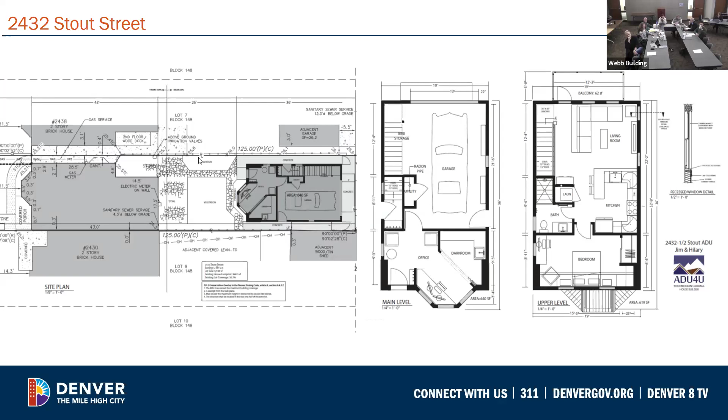Pictured here is the site plan and the first and second floor plans for this ADU. The ADU will be 36 feet by 19 feet and will be 24 feet in height. It will be located at the back of the lot, and the floor plan page also shows that the proposed windows on the ADU will be inset 2 inches.

Per the commission's comments, the applicant has simplified the detailing and removed the stepped parapet on the northwest elevation, but has retained the slant mansard-like roof on that elevation. The primary roof will be a flat roof form with mansard roof dormers and a hip roof bay on the northwest elevation. The flat roof will be clad in a membrane roofing material.

The mansard roof will be clad in a fiber cement half round shingle siding material, and the dormers and bay windows on the northwest elevation will be clad in standing seam metal roofing material with a matte black finish. The southeast alley elevation will feature hip roof canopies over the garage door and over the rear balcony, also clad in that standing seam metal roofing material with a matte black finish.

The northwest elevation will be clad in summit brick in the color medium red, and the brick will wrap the corners of the building. The southwest, northeast, and southeast elevations will be clad in that fiber cement half round shingle material that's on the slant or mansard-like roof. The building will feature Weather Shield double hung aluminum clad wood windows.

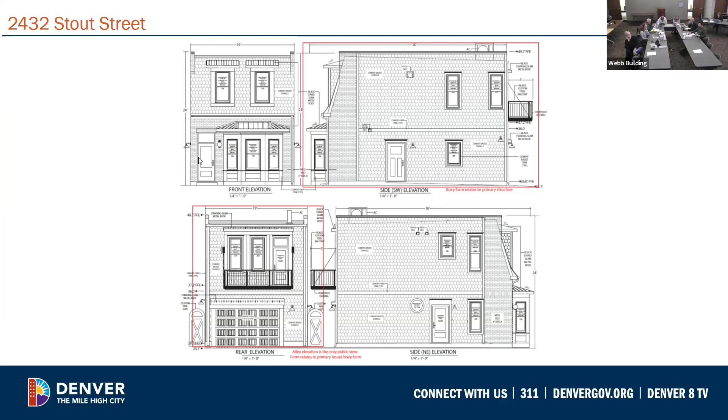Staff would like to note that the buildings on this block are very tight together, and the ADU will be only slightly visible from public vantage points. While staff feel that visibility does factor into the overall impact of the ADU, staff base their review on previous commission deliberation as well as the design guidelines, which don't really talk about that visibility.

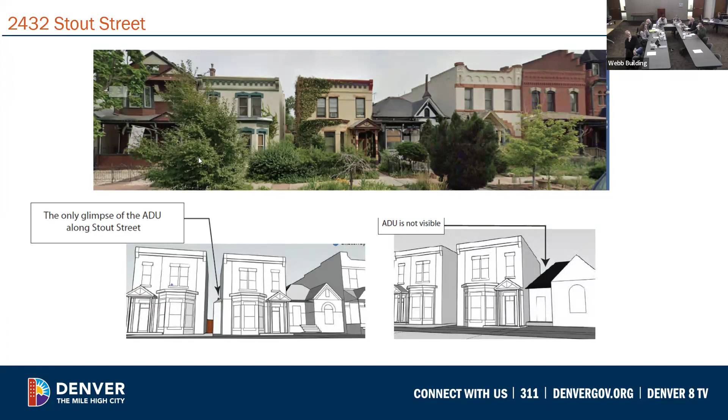So staff feel that the proposed ADU draws more from the surrounding eclectic style primary structures in the district rather than relating to the Italianate primary structure on the lot or other 2-story secondary structures in the district. Historic secondary structures in this district tend to be simple boxy forms with gable, hip, or cross gable roofs.

While not all historic secondary structures replicate the primary structure in form and appearance in this district, many of the historic 2-story structures have a simple and consistent form that relates to other secondary structures in the district context. So staff feel that the proposed ADU does not relate to the primary structure, nor does it relate to the historic secondary structures in this district.

And the applicant included in their materials several examples of secondary structures as well as primary structures in this district to provide some context. As you can see, not all of them match that primary structure, but there is a simple form between all of them, and there is a relationship between those secondary structures.

So during the July 11th meeting, the commission expressed that they would not be supportive of an oversimplified box or an overly complex replica. The commission discussion centered around creating a balanced design that draws from the primary and secondary structure context and is of its own time, and does not compete with the historic structures in the district.

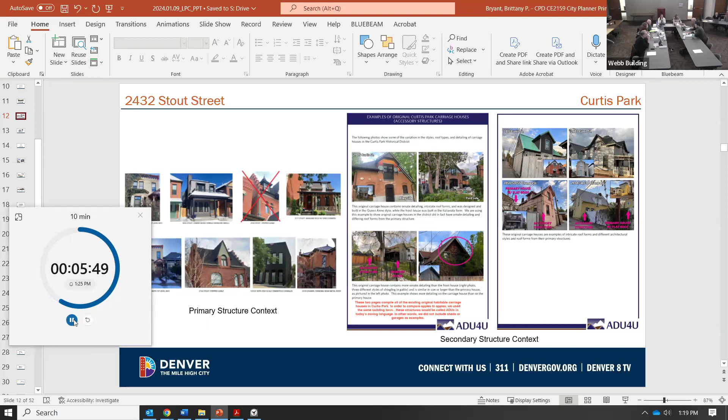Oh, Jim, sure. Yeah, I guess I'd like to point out, from an owner's perspective — me and my wife own 2432. We are the current stewards, as we like to think of it, of 2432, and the several things in this design are also within the confines of what the property is.

Right now there's nothing built there in the backyard, so this will reduce the backyard greatly. We're planning on living there for quite some time, so we are trying to maximize the amount of space inside, with the bay window and the sloped mass reduction at the top, while also providing light and usability on the outside, because that backyard is important to us.

It is a postage stamp, hopefully one day when this is built, so mass reduction is very important. Also, Hilary and I are very against the idea of building a box — we do not want to build a box.

It would be easy for us to get that approved based on other things we've seen approved, and we understand we are asking for a little bit more here, but that's just not sustainable to us, and we don't think that's actually in the spirit of the neighborhood.

The neighborhood is built of eclectic structures. They're well built and they all have character, and we are not trying to impede on them — we are trying to add to that story as much as we can. We don't think a clapboard box adds to that story.

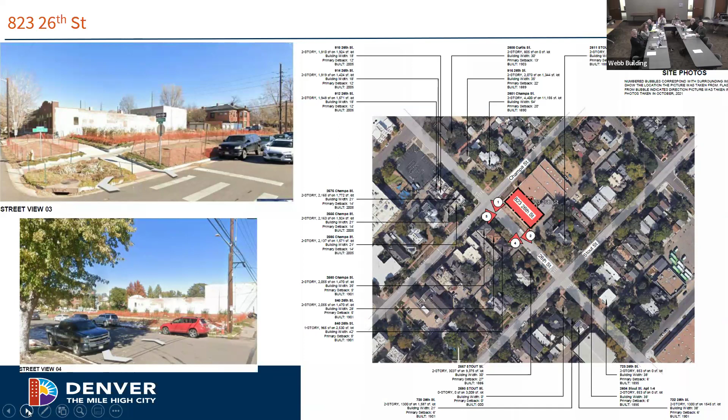So this is for the property at 823 26th Street, located in the Curtis Park Historic District and proposed for a vacant lot. On the left side of the screen you can see the location of this vacant lot at the corner of Champa Street and 26th Street, and on the right is an overview of the site and surrounding context.

Here's an existing streetscape study included in the application; there were a few pages but I just used this one. The applicant is proposing to build a new 5-unit, 2.5-story row house infill structure with a new 1-story garage structure with one parking space per unit facing the alley at the rear. The new row house structure will face 26th Street, each unit having a front entrance with a porch feature facing the street, and each unit will have a roof deck and half-story space on top.

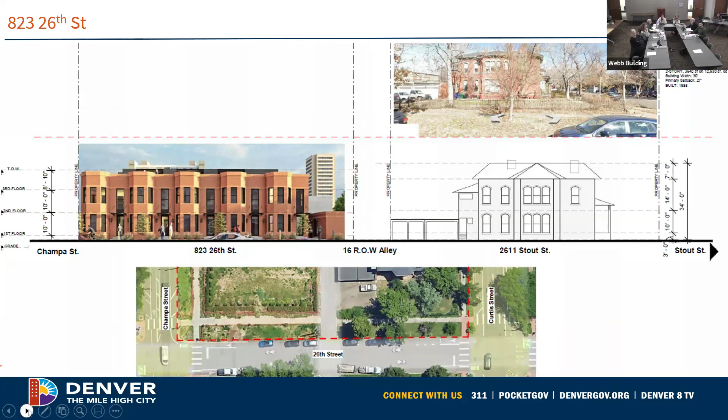Here's the compatibility demonstration included in the application. The new proposed structure has a flat roof like other Italianate styles seen in the district. The overall mass of the row house structure is subdivided into smaller bays with window bays like the ones found here, and entry porches. Individual units express typical historic proportions and boxy building forms found in the district.

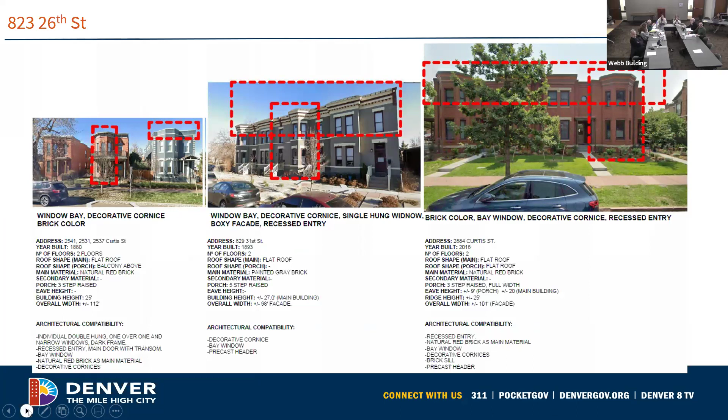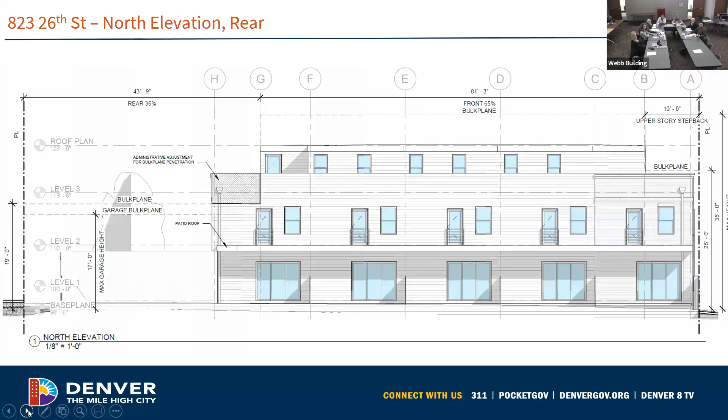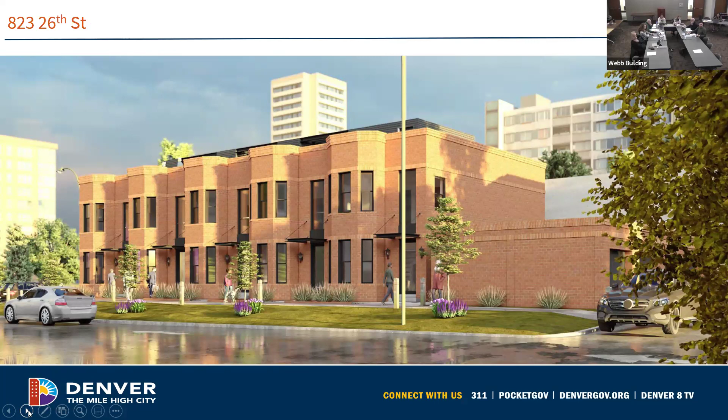And finally, a view towards Champa Street and 26th Street, right at the corner. The new 5-unit row house structure and garages meet design guidelines 4.9 through 4.12 and 4.15 through 4.17, and appear to match historic proportions and heights found in the district. Therefore, staff is recommending approval of the phase 1 application for mass, form, and context, as well as recommending approval of the administrative adjustment.

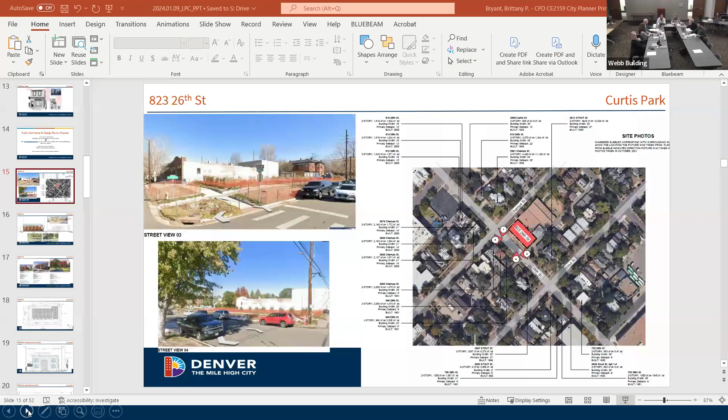We don't have anyone in person here, so I'm assuming the applicants are with us virtually. I don't do... it's probably people raising their hands, but they normally jump to the top when that happens. So that's one of the applicants there, Zeke. Sorry, the mouse is so fast. You should be able to unmute and turn your camera on whenever you're ready.

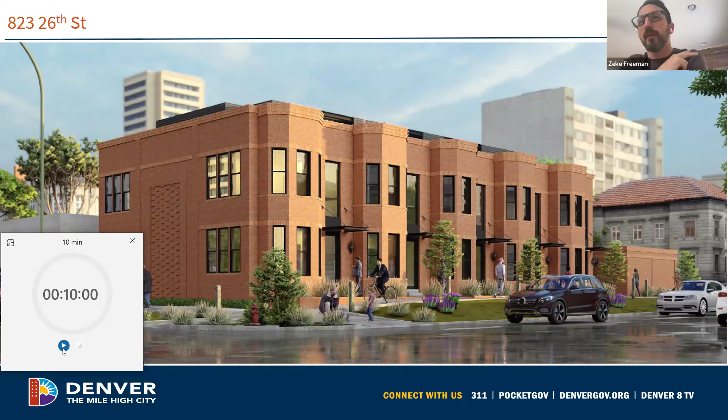Zeke Freeman with Root Architecture. Address is 23416 Navajo Road, Indian Hills. Brittany did a great job going over the overall project and proposed scope of work, so I won't spend too much time in detail on it. Mainly here to answer any questions, and can cover any kind of design questions or aspects you guys have.

Specifically, the window panel got brought up. I'd point out that on the 2D CAD elevations, there's kind of a shadow line that makes it look a little bit like glass. It actually is a metal panel, as you can see in the 3D rendering here. So it would be an 8-foot full light glass metal panel, and then a simple glass window up above. The intent on the project is to have a really well crafted, simple Italianate style row home. We've taken the time to make sure that all of the articulations and details really add to the character and fit into the neighborhood.

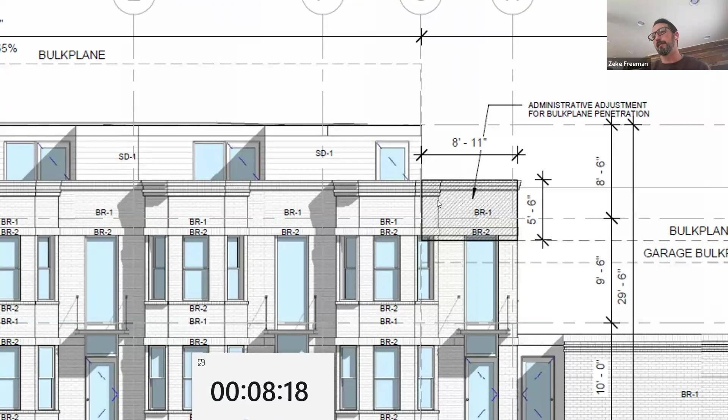The administrative adjustment we're looking at in the upper right corner—we did look at several options early on, with input both from staff and the neighborhood group in our initial massing of this project. We did elect that pursuing this 5-unit option with a full 3rd story is really important to the project and to the character, to keep the rhythm of the row homes coming across. We looked at some options to lower that down, and it just creates a lot of awkwardness and oddity. So we think this really creates a nice, simple, symmetrical design.

We appreciate staff support on that. The 3rd floor, we've made efforts to keep that subordinate so that it's set back, probably a dark siding, and then really bring forward a nice brick across the majority of the mass of the project.

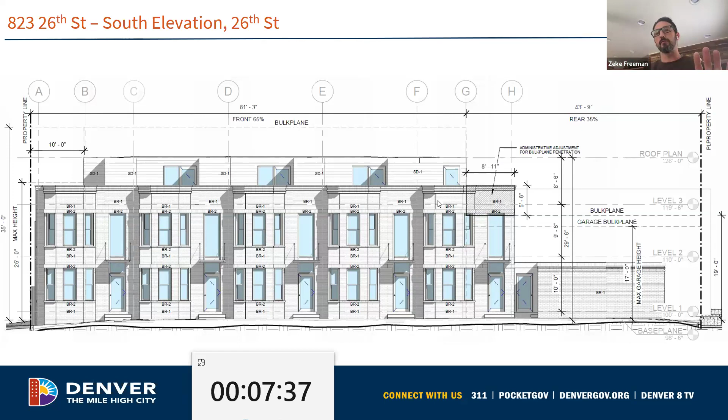The brick wraps around, obviously the front 2 street-facing facades and the alley side, and then wraps around the corner here, as you can see, along the full width of the full unit, before transitioning to a siding that's much more hidden in the rear portion of the building.

On this side, we did receive some feedback along the way to really try to dress this side up in a way that gives some articulation. The function behind this doesn't make sense to have windows where we've got that brick detailing, but we thought this was a nice way to add some character to the building and put light in where it makes sense. So this side still addresses the street, although it's the side of the project, and then obviously we have the main facade around the corner. So that's kind of an overview.

Glad to answer any questions. Thanks for all of staff's and the neighborhood's input on this project—it's been a really fun project.

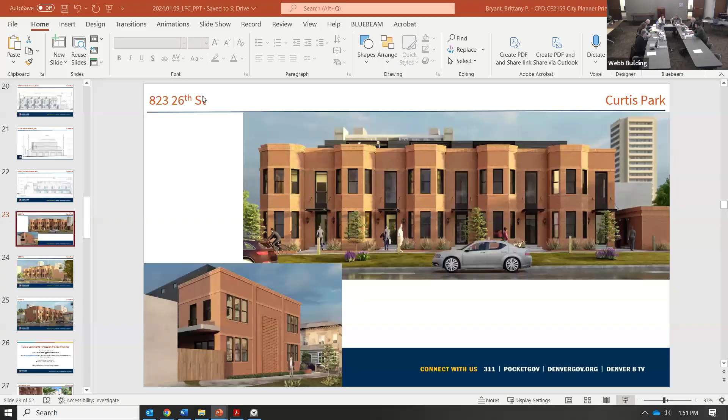Okay, commissioners, let us deliberate. What are your thoughts on this? And this, of course, this is phase one, mass form and context.

I support staff's recommendation on this. I think it's a nice design, in line with the guidelines. In terms of specific feedback for the spandrel glass panel that connects the two, I think it's a nice feature. I do think it's in the spirit of the guidelines, relative to a modern interpretation of what's going on in the context. And then the architect addressed my concern about the west elevation as well. So I'm supportive.

Excellent, all right. Any other comments? No, Nick addressed everything that I wanted to. Well done, Nick. I was just writing down, meets letter and spirit of the guidelines, so clairvoyance here.

So is that a friendly comment? I guess it's a question of whether that's something we want to make a condition of, since it is part of the form. I don't know what other people think. What are your thoughts?

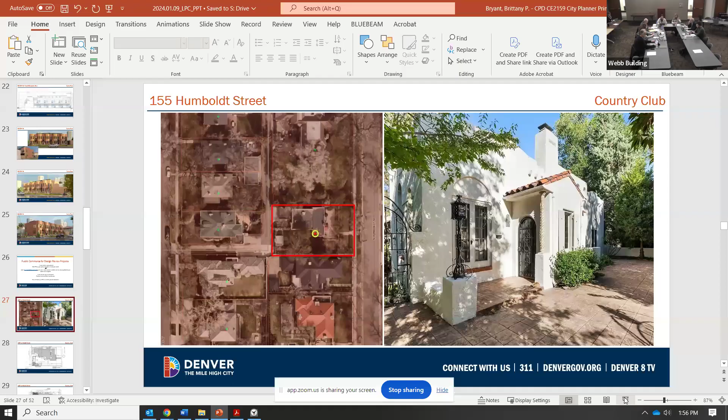Our next application is for a rear addition at 155 Humboldt Street, a contributing structure in the Country Club Historic District. It's a small one-story Mission Revival style structure. The commission previously reviewed an addition involving over 40% demolition to the home in January 2023, and that was denied by the commission.

The applicant then revised the two-story side rear addition design and presented it to the commission in June of 2023. However, the commission felt the proposed two-story addition overwhelmed the historic structure and was not subordinate to it.

That addition was denied as well, so this has been significantly reduced in scale and scope. Here is the existing property outlined in red. This is a T-shaped building, a little longer in width along the street and narrower to the rear. It currently has an attached garage on the north side of the property, shown here.

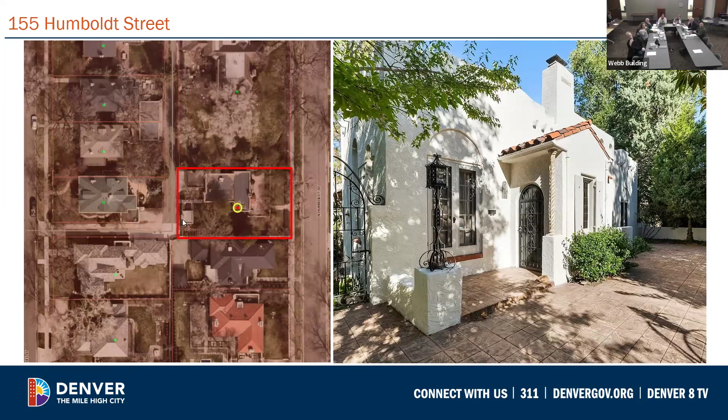This is an accessory outbuilding structure. The date of construction is unclear - it may or may not be within the period of significance. However, at prior meetings the commission commented that this accessory structure and landscaping contribute to the overall feel and setting of the home. In the prior submittal this structure was proposed for demolition, but it will be preserved in this revised submittal. It's a bit hard to get photographs of this home, so this is the front facade.

Here is the existing site plan. There is a 361 square foot attached garage, and the property has a solid masonry wall surrounding it and a large front patio. The front of the property will be preserved, and all work is located towards the rear.

Here is the proposed site plan. The applicant is proposing to demolish the attached garage and construct a new garage, a bit larger at about 500 square feet, with a gable roof form concealed with a mission style parapet along the alley. The applicant is also proposing a new connector addition at the rear of the property, around 200 some square feet.

That existing outdoor structure on the south side of the property will be retained, with very minimal changes proposed to the rest of the structure. There are some changes proposed to egress windows on the north and south side, but they're all interior lot alterations. Here is the proposed demolition plan showing demolition of the existing garage.

The demolition calculations have been significantly reduced for this project. It was previously proposed at over 40%, and currently demolition is proposed for 12.3% of the exterior walls and 1.25% of the exterior roof structure. Staff are supportive of the demolition scope for this particular property.

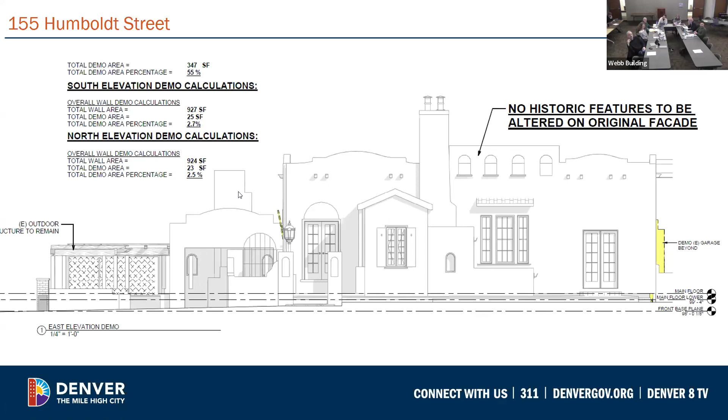Here is the front facade. There aren't too many significant changes. The existing garage does stick out just a bit on the north side of the property, and that's the major scope of demolition there, along with a pergola shade structure on the south side proposed for demolition. But no major changes to the front facade along Humboldt Street.

This is the alley elevation, where the majority of demolition will occur - 347 square feet, counting for a total of 12.3% of the entire exterior walls. We are supportive of this proposed demolition scope as it is located at the rear and will not negatively impact the massing, form, or structure of the existing structure. That's the pergola structure proposed for demolition, and a gutter on the front elevation proposed to be demolished as well.

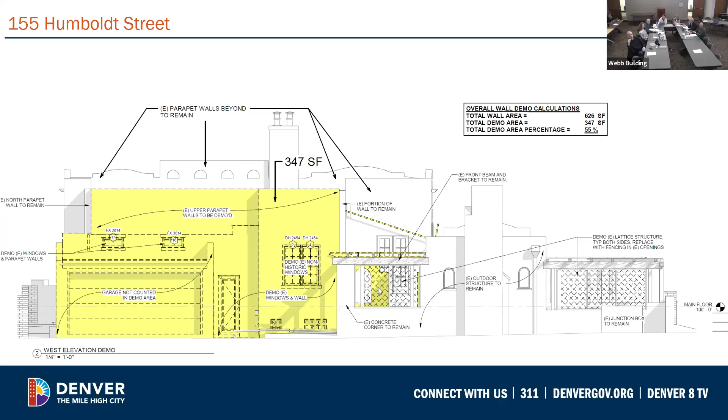So here is the proposed addition. Again, the garage will have that gable roof form to shed water onto the north and south side of the property, but will be concealed with a mission style parapet roof. The design is slightly different than the existing structure. However, staff feels that it is compatible enough with the surrounding context and the existing structure, and does help conceal that gable roof, as this is primarily a flat roof appearance structure.

And then the new rear connector addition, which you see here, that will be totally flat roofed, also concealed with a parapet. There will be some shed roofs with tile covering the windows on the rear of the structure, and then also covering the patio doors. There is some shed roof tile structures on this home, and the tile is proposed to match those existing tiles. However, I have not been provided manufacturer specs, so that is one of the conditions of our approval.

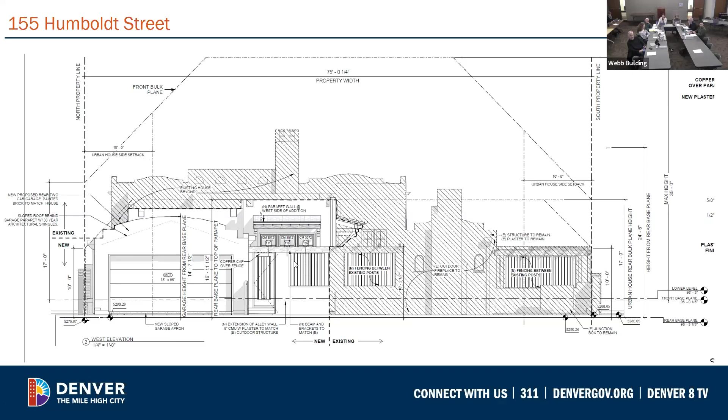Additionally, the site wall will be expanded. It is a stucco site wall. It will be constructed of CMU block and covered with stucco, and will blend in with the surrounding context. Just a simple steel roll-up door proposed for that garage.

There are some notations here that the windows in the basement will be replaced. It's unclear to staff if they will require larger egress light wells, so we are asking for clarification on the egress and light well project scope. However, generally speaking, staff reviews alterations to basement windows administratively, even if it is more than 3 windows, and does not forward that project scope to the commission, particularly when it's on side interior facades, as this is proposed to be. It does look like that they're simply just cutting down the existing windows and replacing some of those windows to provide additional light into the basement space.

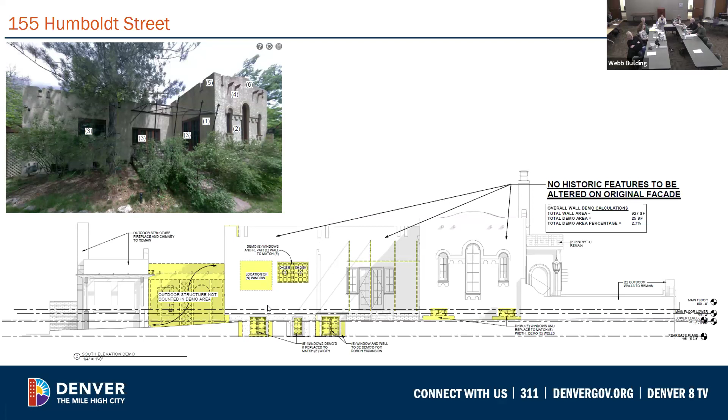So here is the proposed south elevation. The addition is not inset from the wall plane of the historic structure significantly, but because there is a change in material, there will be a very, very slight transition.

I know our guidelines typically talk about 4 inches, but staff feel that as the front facade of the structure is wider on the street and gets narrower to the rear, it is subordinate to the historic structure. It does step down in height, and there is a change in material.

So we do feel it is differentiated from the historic structure without that significant change in wall plane, but there will be a very slight one due to the difference in materials. That shed roof over those patio doors is similar to the front facade. We're asking for those material specs on the tile specifically. The garage roof will be clad in asphalt shingle, but it will really only be visible from the north and south elevations.

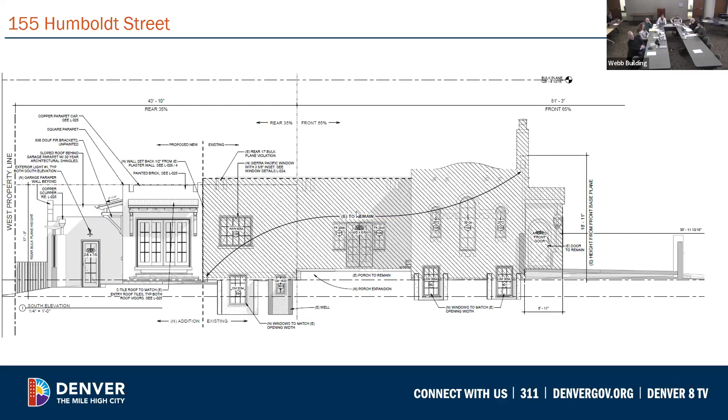So I do have some questions over some of the details in the application materials. As I stated previously, the existing structure is clad in this existing rough coat stucco. Some notations indicate this existing rough coat stucco is to be replaced, principally on the materials page, and in the elevations it is noted to remain. This is likely the historic material.

So we would like that historic material and finish to remain intact and only be repaired where necessary if it's damaged. We would like some clarifications on the existing historic structure stucco project scope.

All the windows in the new addition will be inset into the wall plane, and they'll be inset 3 5/8 of an inch.

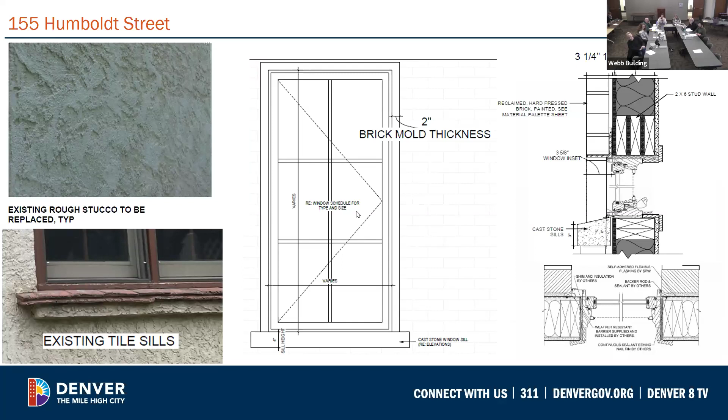Thank you, Brittany. Commissioners, do you have any questions for Brittany?

I'm sorry if I missed this, but you were talking about the basement egress and also needing information on that, is that a condition? Yes, that will need to be a fourth condition: provide specifications for the basement egress openings and wells.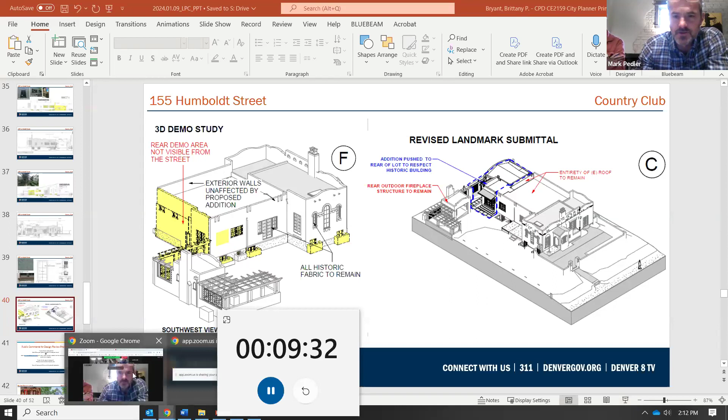Thanks, Brittany, for the thorough review, the third time. Ownership of this property did change hands between my last submittal, which is the reason for the drastic change. There were a few notes from a previous submittal we were trying to cull through and separate the two projects. So this is indeed a different owner now and a very different project.

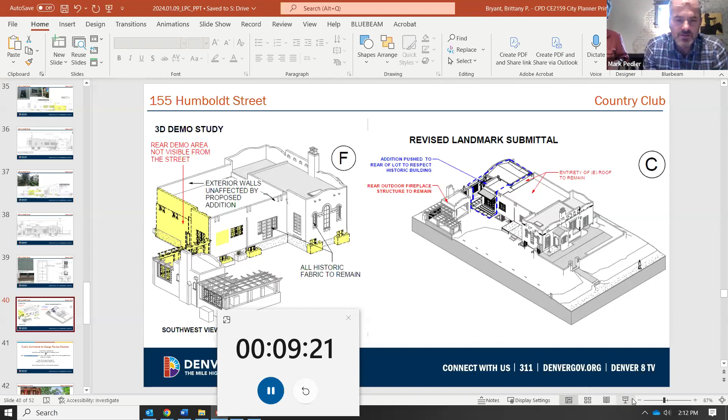The comments I'd like to address: we did choose to use a reclaimed hard pressed brick on the addition. This is a solid masonry building with a concrete plaster on it, and we'll be setting that brick back about 3/4 of an inch from the plaster, so there's a distinction where the plaster is not, but it looks like it could be. I've done that once before and it turned out really nice.

So it still feels authentic, but it is a distinction. And the stucco on the original building, the note that's correct is that we're not planning to disturb it or change it, so we'll correct that conflicting information on sheet L009 or L025. And then on the egress, on sheet L009, you can see where we're proposing to change the window wells because the ones that are there now are shallow and not very deep.

Where we need egress, we added one in the front bedroom, which is on the northeast corner. This lives behind that whole front terrace, so it's not really visible from the street, but we do need to build that out so we can get egress there, done in formed concrete. I think what we'll do is go over that with stucco to match the existing building so there's uniformity of material.

So the other wells are of that same material. The change you'd notice is that they're pushed out further into the yard slightly to meet egress. Those two wells on the south side of the main historic volume also live behind that entire front terrace area, which I don't believe is historic, but we're keeping it anyway. So none of those will be seen whatsoever.

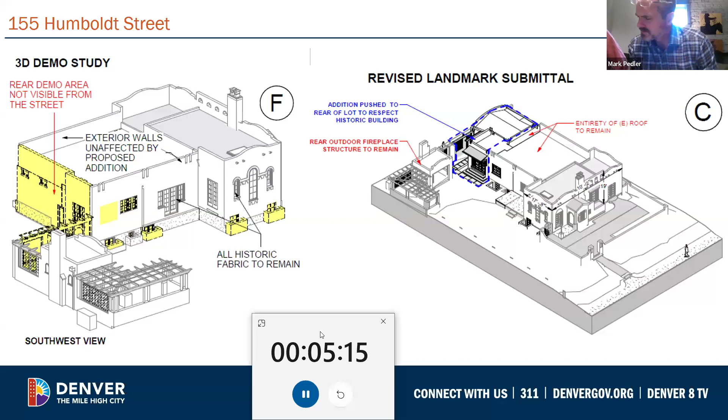But anyway, it's a very gentle approach. Found a very nice client who happened to live right down the street and wanted a single, simple historic building to live in with just a few adjustments. So pretty pleased with the subtlety of this operation. But I think that addresses most of Brittany's comments. So I think that's all I have to add at this point.

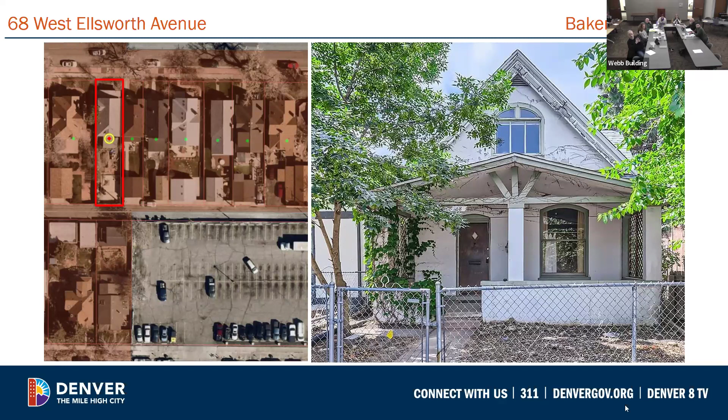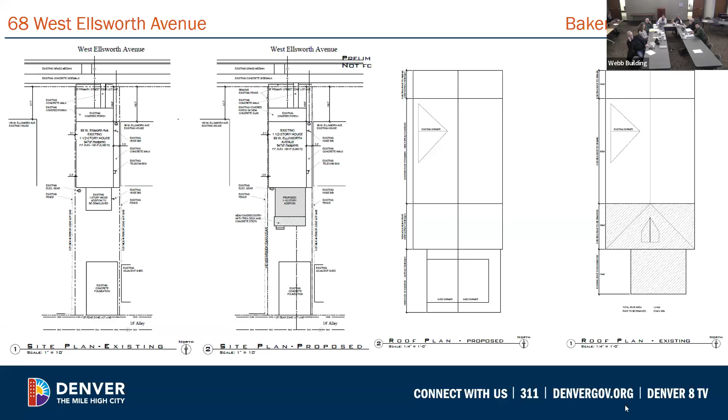So the applicant is proposing to demolish the existing rear 1-story addition and construct a new rear 1.5-story addition with a rear porch. To accommodate the new addition, the applicant is also proposing to demolish the rear hipped roof and convert it into a gable roof form at the rear. This is something we have seen fairly often within the Baker Historic District, and the proposed demolition is less than 40% for the historic roof, so it was not triggering a public hearing.

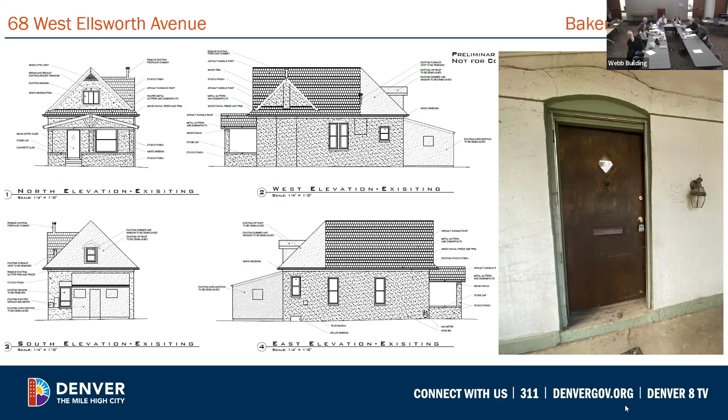And then you can see that hipped roof form with dormer that will be demolished in this street view along the alley. So again, here are the proposed conditions. The existing non-historic front door will be replaced with a front door that is more compatible with the architectural character of the structure, and the existing historic wood windows on the structure will be retained and preserved where necessary, along with some general maintenance to the primary structure.

So here's the proposed rear addition. Again, the hipped roof will be converted into a gable roof, and the new addition will step down from that new ridge line that ties into the ridge line of the historic structure. It is about a foot, and the proposed addition is clad in lap siding at the ground floor, and then in the gable face and dormers, it is proposed to be board and batten siding.

The addition is offset slightly from the west elevation, which creates the slightly asymmetrical roof line of the addition, particularly noticeable on the south elevation. Staff feels that one material would be better for this addition, as the transition line on the west elevation between the two materials is somewhat awkward.

So we are recommending only one material for this addition, either board and batten or lap siding, or alternatively, the lap siding be brought up to the eave line of the roof on the west elevation to make that transition a little less awkward. However, given the change in material, the inset on both sides of the structure, and the tight property lines, staff are not overly concerned that this addition is not totally symmetrical in the rear for this particular property.

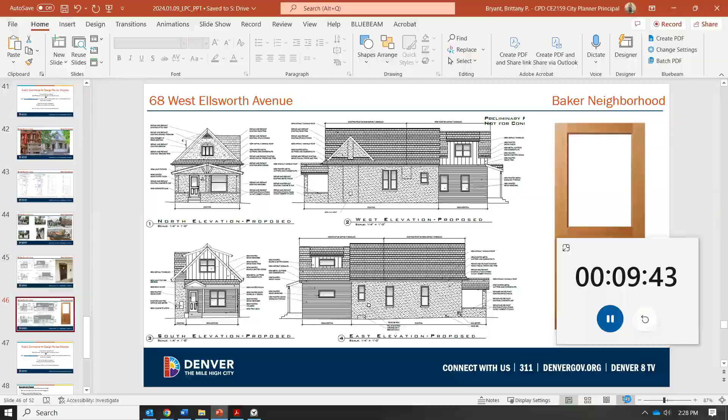I'm sorry, I'm having some technical problems here. Well, we can hear you okay. So we're doing this addition to remove the, I'm sorry, is there any way I can, you hear me okay now? So Jeff, we can hear you, the 10 minutes are yours. I keep getting an echo every time I talk, that's the problem. Oh, we're not getting the echo. I know, every time I talk I hear myself for like 3 seconds later and it's distracting. Oh, that's awful, I'm sorry. Yeah, it's probably because it looks like you joined on 2 devices. So let me try to leave on one. Okay.

Can you guys still hear me? Yeah, that's actually a lot better. Okay, I apologize, I had to turn off my computer and now I'm just using my phone, so I don't really have access to see what you guys are looking at right now.

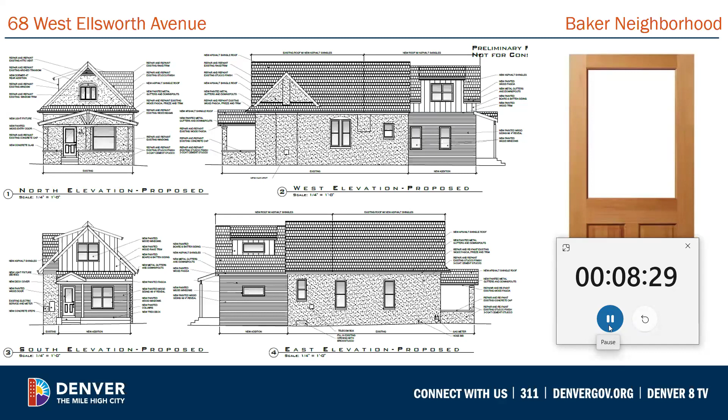That's it, I really don't have too much else to say. I think everything's been outlined by Brittany already, so I guess if there's any questions, I can answer them. All right Jeff, thank you. Commissioners, do you have any questions for our applicant? I don't.

Okay, it doesn't look like there are any questions. So thank you for joining us, Jeff. Okay, sorry about that. No, it's okay. It's totally fine, we're living the dream over here too sometimes.

Okay, so now we go on to the public comment for the design review. If you're joining by phone, you can dial *9, or email us at landmark@denvergov.org, or if you're on Zoom, click the hand raise button. Do we have anyone? No, it doesn't look like we have anybody.

Okay, staff, do you have any additional comments? Yes, I believe I said fiberglass windows. They are actually aluminum clad wood windows. Okay, noted. Anything else?

All right, then commissioners, let's go on into deliberation. What are your thoughts on this?

I agree with staff's assessment. I think this addition, the scale of it and its placement, work very well. The only awkward thing is the two different siding materials and their placement, so I would agree with staff's recommendation for the condition to change that in one of two ways. Okay, yeah, I agree. Other comments?

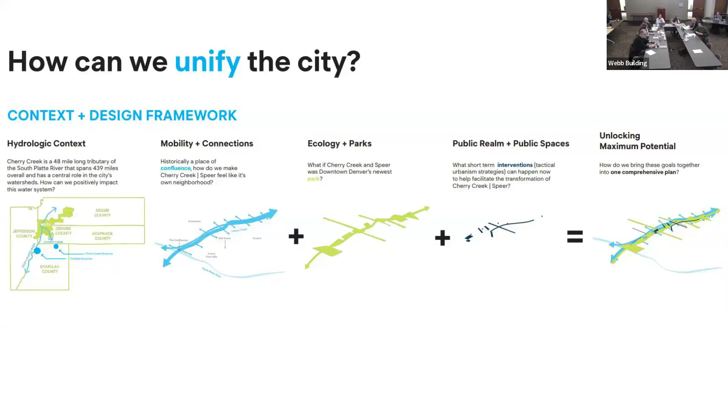Obviously, Cherry Creek is an important spine along Speer Boulevard, and it's a historical place of confluence. Together we've been exploring mobility, ecology, parks, and the public realm, considering both short and long-term potentials. How can we transform Speer and Cherry Creek into a unifying element in our city instead of a division as it is today? Next slide.

So this study has 5 key goals. The first is amplifying the creek. The second is planning for downtown activity. The third is reinforcing our city transportation goals. We need to think differently about how we move people across the city, also through this corridor and along it. Fourth, celebrate the history. And fifth, consider what could happen nearer term as well as longer term.

Connectivity across Speer between downtown Denver, the Auraria campus, Ball Arena, and River Mile is really important, but there has to be a reason to cross. Today, you cross primarily on foot or bike if you're a student or faculty or staff member at the campus, if you're going to an event at Ball Arena, or you're going to the amusement park. Over time, we've got ambitious plans to really transform the area, and Speer, along with those plans, needs to transform.

So we have a bold vision statement. You can see here: imagine Cherry Creek and Speer Boulevard as an ecological corridor in the city of Denver with the potential to unify downtown, plan for growth, enhance the movement of people, and amplify art and nature in the city. Next slide.

So this is a map of our study area. We're looking at Speer Boulevard and Cherry Creek between Colfax and I-25. It's important to understand there are many adjacent stakeholders as well as transformational projects, many of which I've already alluded to, coming online, which is really the impetus for thinking about this corridor. Next slide.

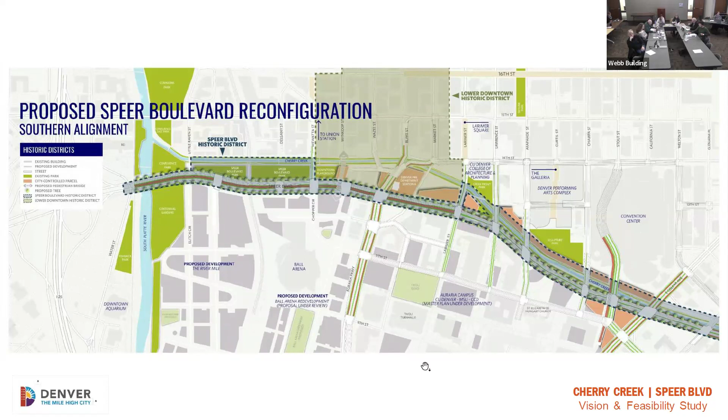In addition to the southern alignment of Speer, 2 intersections were studied further for potential reconfiguration, again intended to create a more simplified traffic flow and also to unlock the potential for land use. More study is needed on both of these to confirm the strength of them, but we're excited about the potential.

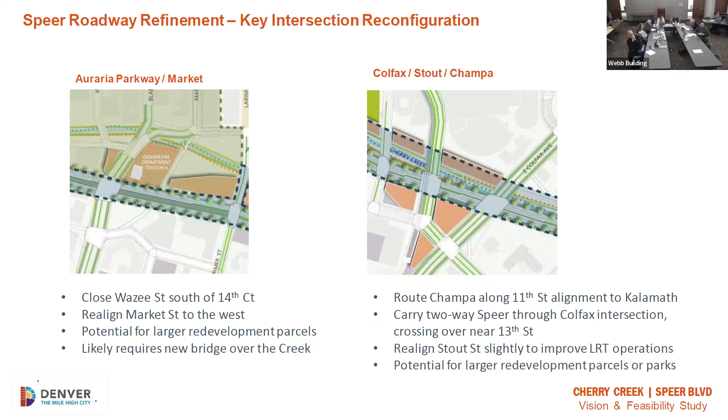So what could these new public spaces look and feel like? We're thinking about them in 4 distinct character zones that you can see here. The Confluence extension near I-25 on the left functions as a gateway to downtown Denver and also connects to the future River Mile district.

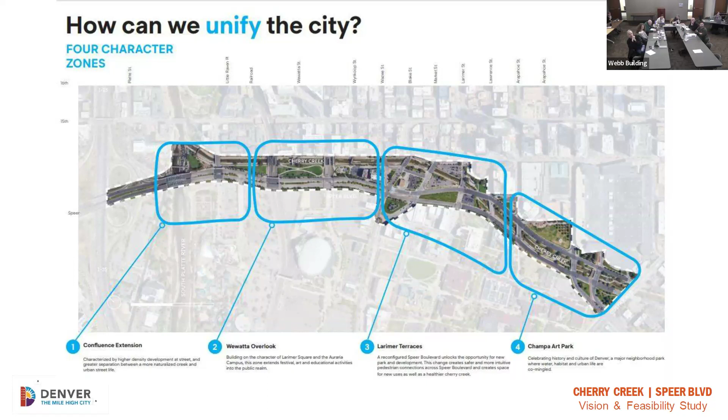Wewatta Overlook gives us the opportunity to connect Ball Arena to lower downtown more graciously. At Larimer Terraces, the reconfiguration of Speer unlocks new space for both parks and development. And the Champa Art Park, farthest to the right, is a large new park connecting the Denver Performing Arts Complex to the creek and to the Auraria campus beyond.

At the Confluence extension, we could potentially connect Centennial Gardens to Commons Park, under Speer Boulevard and along the Platte River.

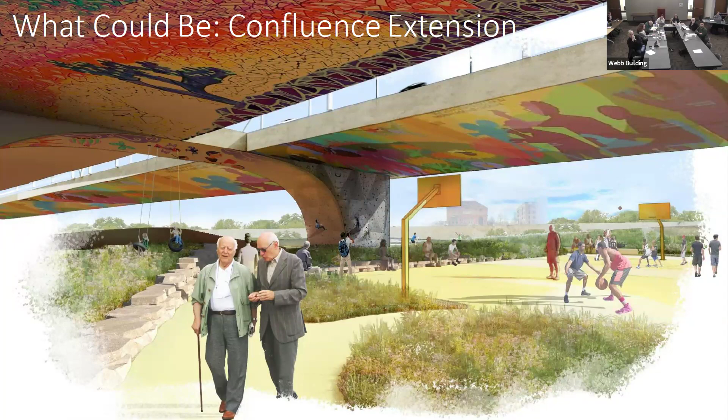The Champa Art Park, as mentioned earlier, could open up substantial new downtown park space that could include event activation, outdoor performance venues, and connection to an ecologically healthy creek corridor for the Auraria campus and for downtown residents.

All right, in terms of what's next, if you want to go to the next slide. So as I mentioned, this is a high level vision and feasibility study. We are expecting a draft report next week. We know there's continued engagement of various community partners, city partners as well, that's necessary to move this forward. Again, this is a high level vision and feasibility study, so what are the options in terms of funding, future design, what other work could be done?

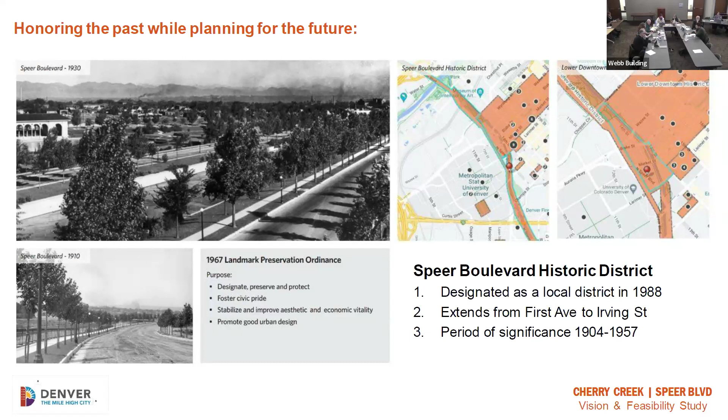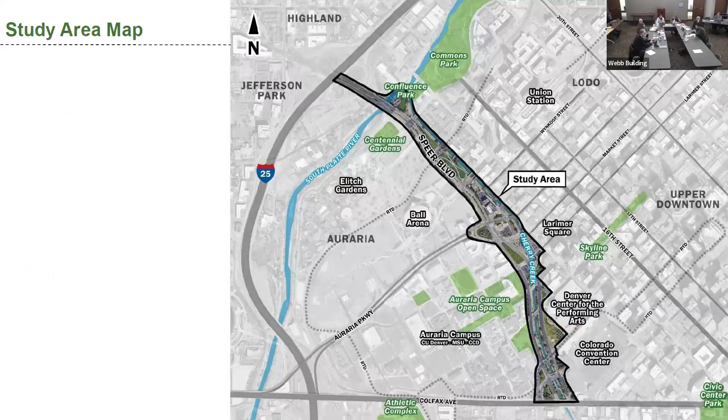Yeah, I guess, and I don't even know how much this relates to this section of Speer, because this is quite different than the other sections, right? But when I think of City Beautiful specifically, I think of symmetry. There's mention of historic vistas, which I think is also an important part of City Beautiful. But again, I don't even know if there was a time that those design principles of City Beautiful apply to this section of Speer. I guess I'm just wondering more about those -- linear, sure, boulevard, yes -- but are there any other design principles that are applicable to this section of Speer, and if so, are they helping drive ideas? But maybe they're not, so, yeah.

I mean, I think to the extent that what we have shared is kind of where we're at today. I think obviously for some of this, getting more into the design details will be really telling, and that's just not at a point where we're at today. But I don't know, Abby, as part of the project team, is there anything you would add? No, it's kind of covered. It's really high level, so it hasn't gotten into these things. It's always kind of hard to know where do you start and where do you stop. It's not beyond the kind of just big picture. But if there are specific things you feel like are really important that we need to make sure we address, if this moves forward, please share that, because that will be really helpful in future phases.

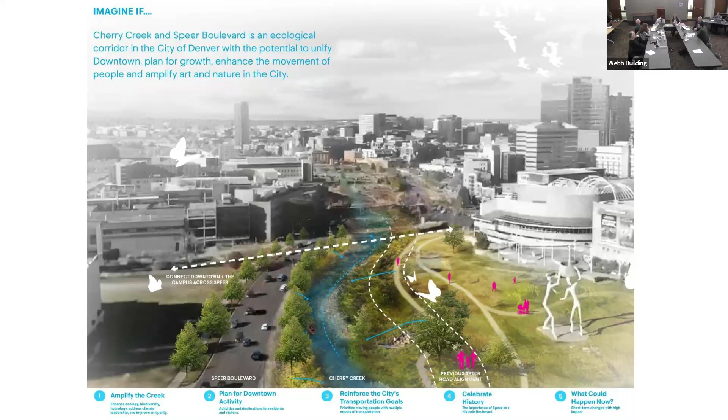Yes, absolutely. As Tara mentioned, we've really engaged experts in public realm design, urban design, transportation design, and water and hydrology. That's exciting because, in addition to the expression of the vision you're seeing that's very interdisciplinary, we also had separate mini teams diving mid-level deep to make sure we're studying feasibility.

For our transportation and mobility team, the first part of your question about how we're making sure we understand traffic and not just moving it to other places is really important for thinking about this whole area of the city in the future, because major transformational development is coming in areas like Ball Arena and River Mile. We need to plan for the future anyway, and mobility will be different in the next 10 to 20 years.

What our mobility team tried to do was really prioritize the moving of people, thinking about it from a volume perspective of people movement and creating opportunity for mode shift, which is part of what Denver Moves was defining.

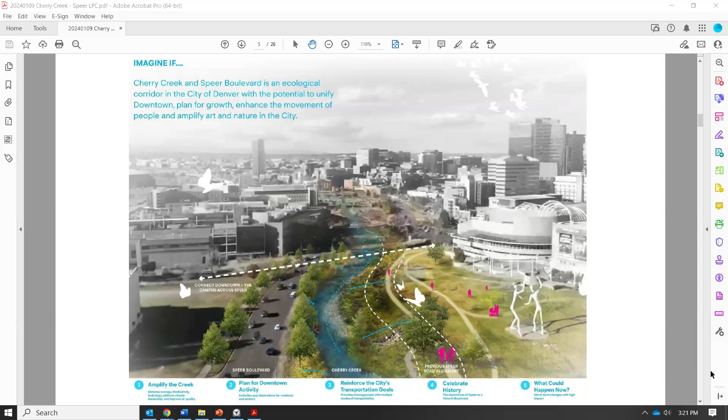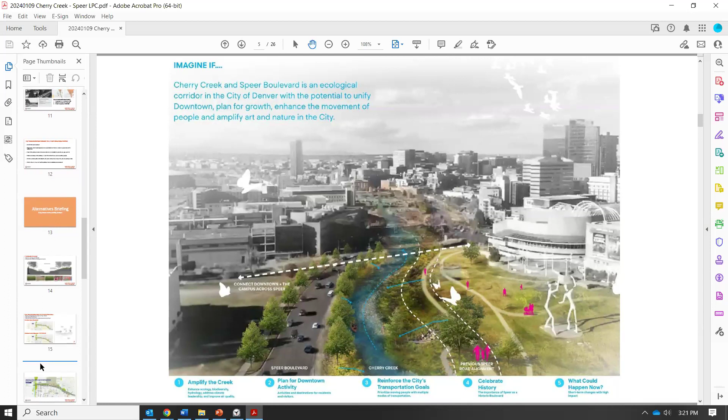What you don't see too much in these graphics is a strong expression or vision for enhancing the Cherry Creek Trail as a safe passage, whether you're going through the whole corridor or partway through, along with an enhancement of bike-ped along the edge of Speer Boulevard, and the addition of transit. Currently there isn't bus service along Speer; it crosses at a couple different locations, but part of what we're planning is reusing or reconfiguring that right of way so we can shift modes, making it less car dominant and enhancing mobility holistically, including bike-ped and transit.

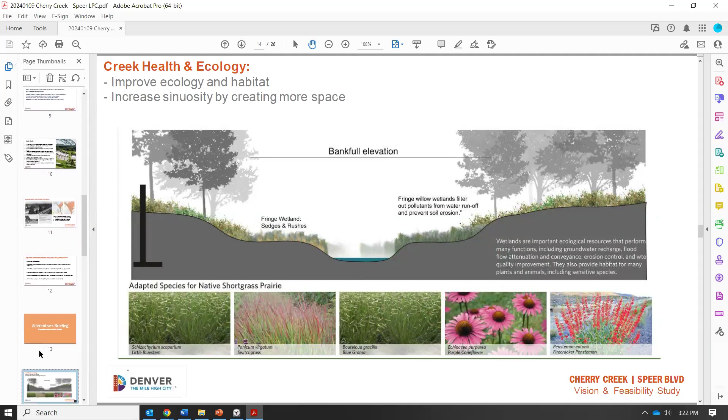As keeps being brought up, this is a high level study. We know full well that in order to really understand where those traffic patterns might shift, one recommendation following this would be a more in-depth traffic study. But for this study itself, it was pretty high level, focused more on identifying volumes of mode shift towards bike-ped and transit.

I just had one question. I don't know if you have any answers, but a couple meetings ago we looked at, as a discussion item, the proposed bridge connecting the River Mile development. I'm wondering if that has figured into this, and if there's any take on it. Personally, I was a little skeptical that elevating pedestrian traffic would create some disconnection from the creek and at-grade city life. Just curious if there were any takes on that.

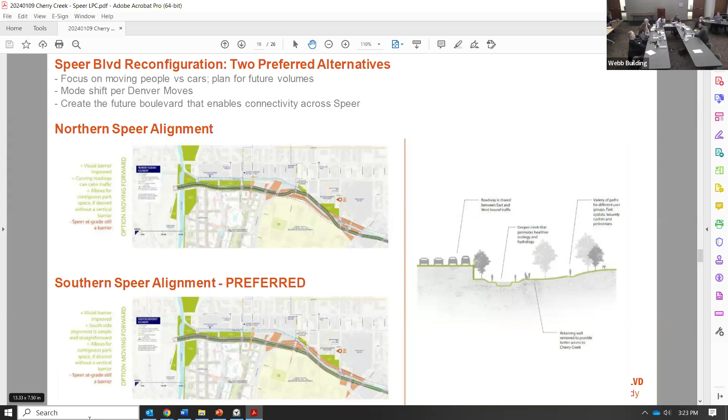Sure, I can start. As Tara noted, and it's hard to tell in the graphics, there's an arrow in the Wynkoop alignment showing the proposal for the Ball Arena Bridge. We're not proposing to change the width of the right of way in this section, so assuming they're building it outside on either end, we don't see a conflict. Our desire first and foremost is to improve the at-grade pedestrian environment. It is not great today, and we know it needs improvements. At times of large events and activity at Ball Arena, is it helpful to have another option for people? I think that's certainly their point of view. We want to make sure there are multiple options for people to get around safely.

That's a great question, Larry. Do you view the proposed pedestrian bridge at Ball Arena as being the first of many? Are you anticipating that the plans you're exploring now, with the reconfiguration of Speer Boulevard to one side of the creek, would lead to introducing others?

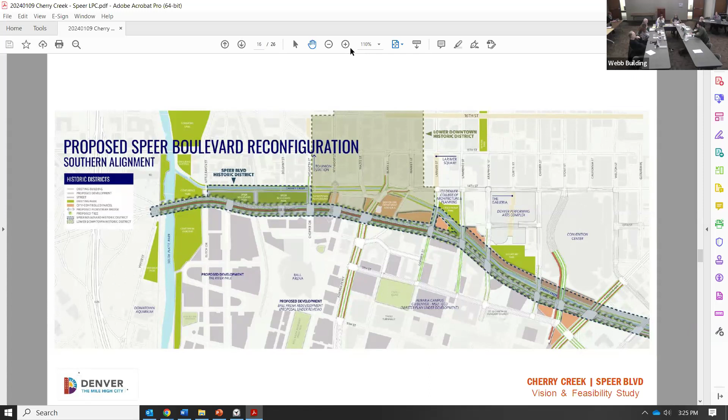From the city's perspective, it is not our plan to add bridges. Obviously, if others continue to propose them, that's something we'll entertain on a case by case basis, but our priority is on improving the at-grade environment. Generally, pedestrian bridges work best when you have no other option, and that's not the case here, but Speer is challenging today—I think we can all admit to that. It's going to take quite a lot of time, money, and effort to see this vision move forward, assuming it's embraced. So we have a span where we continue to see a lot of cars and conflicts with pedestrians, particularly at times of events. I fully understand why they're proposing it. I hope to live in a world where, in the future, that's not as big of an issue.

Is there not to dwell on this pedestrian bridge at Ball Arena, but if Speer does get consolidated to the south, is there an opportunity in that green box, the rectangle generally north of Speer, to depress that from grade down to creek level, and through a series of meandering ramps on the Ball Arena side, bring pedestrians down beneath Speer? Is that something being considered?

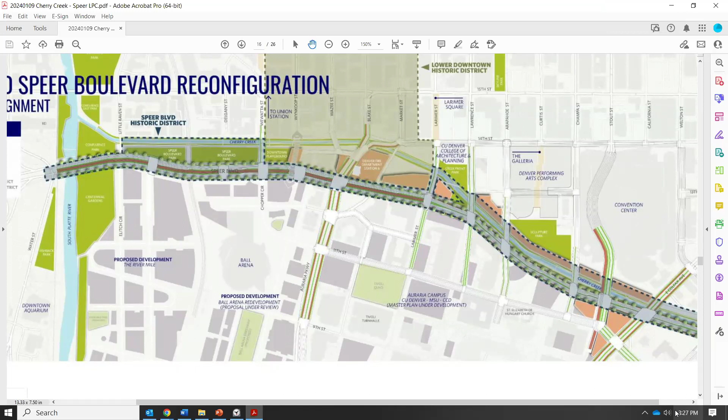I don't think so, but Kaya, can you respond on that? So I'm not sure I understand completely. Are you mentioning this as an alternative to the pedestrian bridge, to consider an underpass instead? Is that what you're saying?

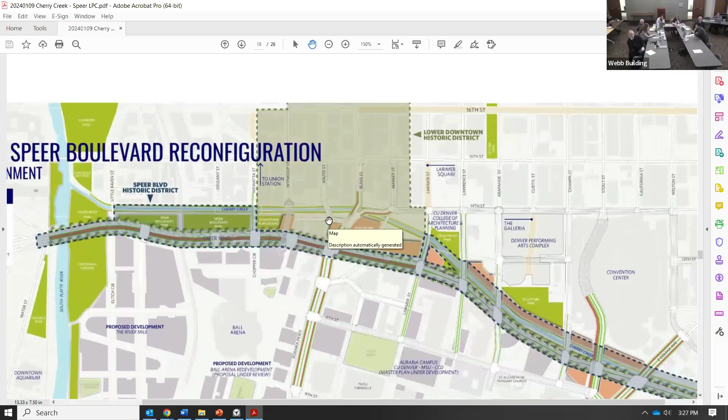Yeah, because as I'm looking at the plan further to the right, you have the art park renderings that show a connection of parks that exist now to the north and south, beneath Speer. Is there that same opportunity as you head west for Ball Arena?

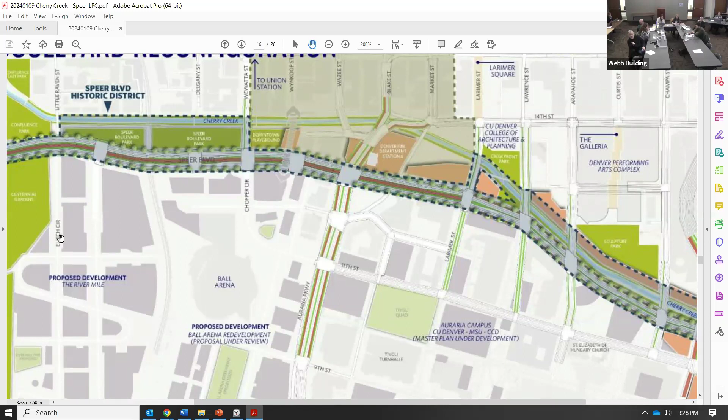Okay, so you're referring to that sculpture park area. Is there a possibility to go under Speer? The other possible place might be Creekfront Park. I don't know which park that rendering is of that shows Speer above it. I'm wondering if that same opportunity exists for Ball Arena pedestrian access to lower downtown.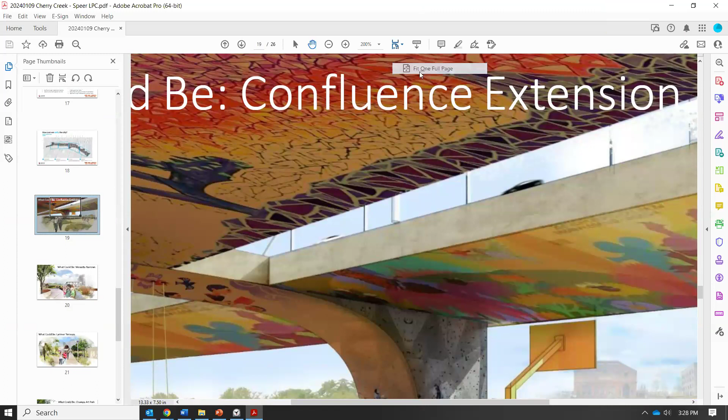So okay, this expression here is an idea of a vision that would really help connect River Mile to Commons Park. What we are lacking currently in the River Mile area is large open space, so this could create that type of strong pedestrian connection in a place where Speer will continue to be one of those higher speed dividers, because you're about ready to get onto I-25.

So if you go back, actually keep going, to slide 21. At the art park, in our conversations with the Auraria campus, we've been doing our best to partner with them and understand their vision for the future of their campus. What they've described to us is a high desire for an urban edge along the southern edge of Speer Boulevard.

When and if we were to remove the northbound lane of Speer, which is essentially where you see those remnant walls, the amount of space that opens up is so dramatic that our recommendation as a design team is to maximize that available space. If we've got that room to lay back the slope, it wouldn't require an underpass at all, and would result in a very significant open space and park.

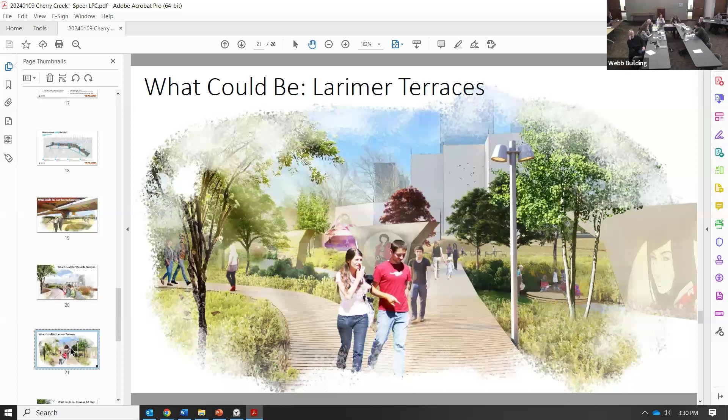Okay, so it was my bad. I was thinking that the part of Speer that would be retained in that rendering was toward the art park, but it's not. It's over toward the Ball Arena, or west of there, at the River Mile. So if you could zoom in, whoever's controlling, on the Champa Art Park to the right.

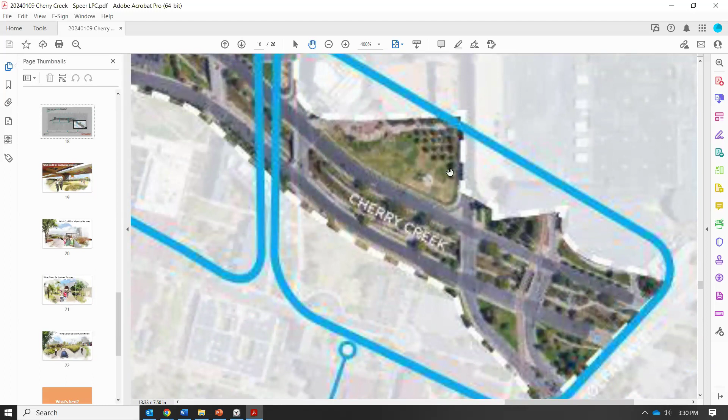Yes, zoom exactly where it says Cherry Creek. So in this section, the proposal is we would reconfigure Speer Boulevard to remove that northbound lane, which is adjacent to the current art park. We would retain the southbound lanes. What that results in is a big opening up of the art park and an expansion of that park. Yeah, I understand that.

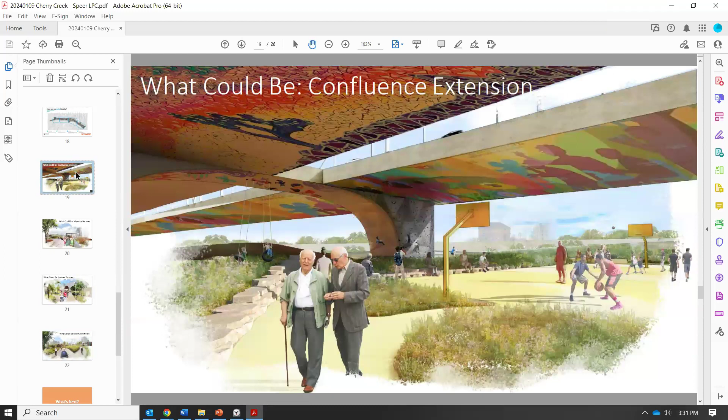I'm focused on the other end, near... oh, now we're going back. Okay, over here, the Wewatta area, go to the next slide, I think.

Yes, exactly, Wewatta. At Wewatta, we, as the design team, have been working under the expectation that the pedestrian bridge is moving forward. That is not part of our proposal, that is part of others. So from our perspective, if you're already doing a pedestrian bridge, we would not recommend also doing an underpass. We would follow what Jill mentioned, doing our best to prioritize the at-grade activity, knowing that the pedestrian bridge is likely to come forward.

I wonder if that's a missed opportunity. If you're creating all that new grade, as you look at this rendering to the left of the people in the foreground, and if you lower that closer to the river level, then you create an opportunity to avoid putting a pedestrian bridge over Speer.

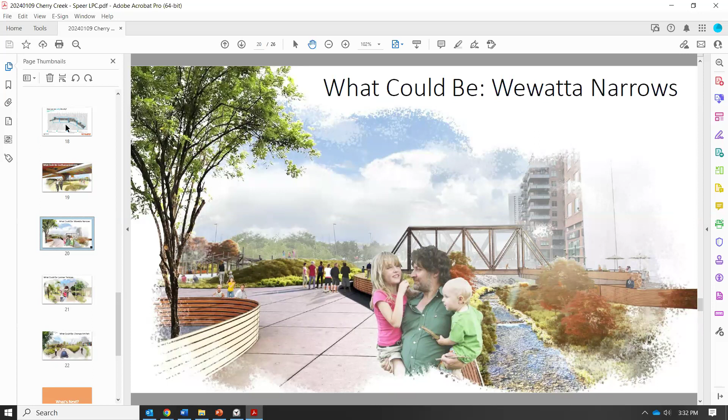Right, we did do a little bit of study on a few cross sections of these four different zones that Tara described. In this area there isn't a lot of grade. That grade would feel, imagine at Larimer, between Larimer and Lawrence, when you cross underneath Speer now on the bike path, the headroom is pretty low. It's not a great experience under there. Not a lot would change, and when you move further west, that height decreases even more. So it's not a great experience as an underpass, but to your point, it could be a potential connector.

We, as the design team, felt like it would be duplicative to try and do an underpass if the pedestrian bridge is already moving forward. Understand, thank you.

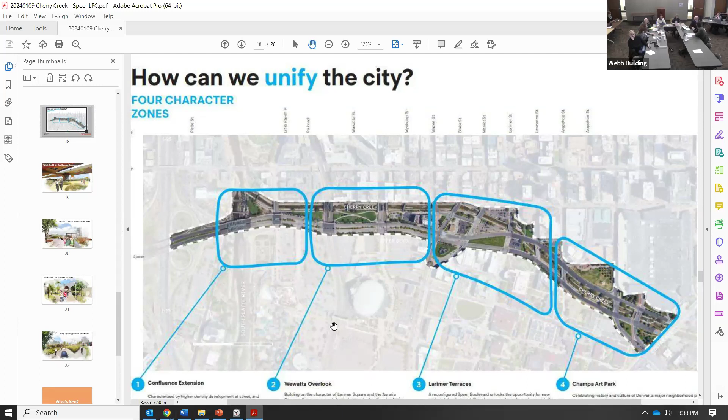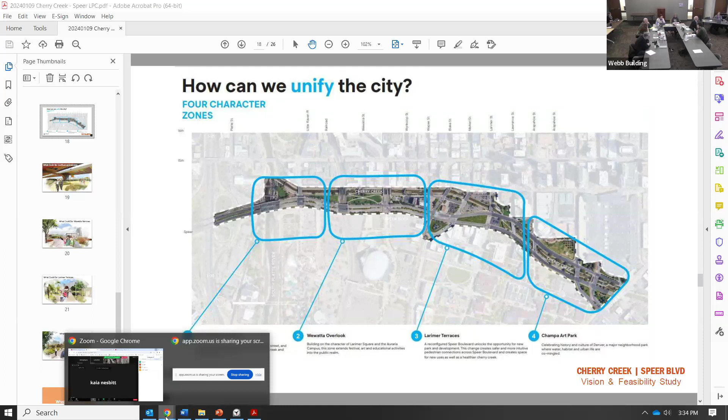All right, anything else? I'm wondering, are there precedents elsewhere in the world where a similar kind of issue was addressed that might give some insights as to what might work and what might not work? I know in Japan, for example, streets have been eliminated and become pedestrian right-of-ways, and perhaps in China the same things have been done. But I'm wondering what other precedents can help inform the vision in a way that there's a higher likelihood of success. I read a book some time ago about the trouble with Vancouverization, where great plans look beautiful even in their implementation, but don't generate the pedestrian traffic that was expected or hoped for. It seems to me that there needs to be some kind of magnets of activity on both sides of the corridor that actually draw people. Providing access alone isn't going to do it. If the centers of activity are inside the zones on each side rather than along the edges, the planned vision may not evolve.

Kaia, do you want to take that one? Sure. That's absolutely something we know—we're not designing in a vacuum here, and there are a lot of places all over the world. One of the first things we did was a whole series of precedent studies.

We looked at Broadway Boulevard in New York. We looked at Harbor Drive in Portland. We looked at shared streets in Amsterdam. We looked at the Indianapolis Cultural Trail. We looked at Clyde Warren Park in Dallas. One of the more interesting places we studied was Cheonggyecheon Stream in Seoul, Korea, which has both a creek restoration and ecological urbanism right in the heart of an urban center.

So just as you noted, from all of those precedent studies we did draw out some key ideas. One thing you mentioned is the importance of magnets of activity adjacent to it, so creating a 'there,' if you will. We also compared these various precedents in regard to grade change—how much difference between the level of cars or motorized vehicles compared to stream level—that sort of quietness creates a different kind of feeling.